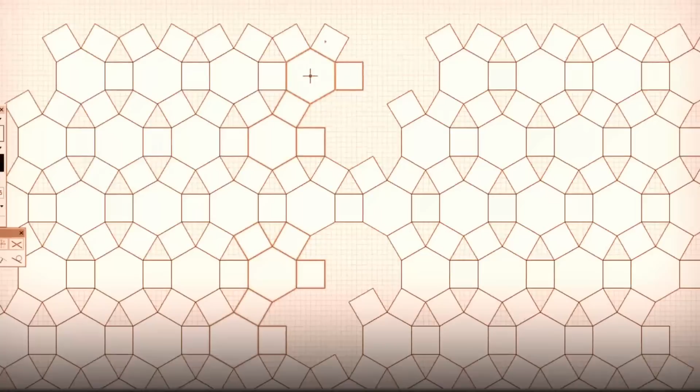In last week's video I set out to do the Everyday Objects Challenge, which this year we're doing something from our kitchen. This year I've chosen to do this grater, shown in the images here. The challenge was to do a front view, a side view, and a top view in 2D of this object, much like you would for a typical technical drawing of pretty much anything you'd like to build.

So I'm going to attempt that now on screen. I'm going to run through my front, side and top view, just doing them all in the same plan, all from the top plan view, and we're going to see how you might approach this as our final 2D object.

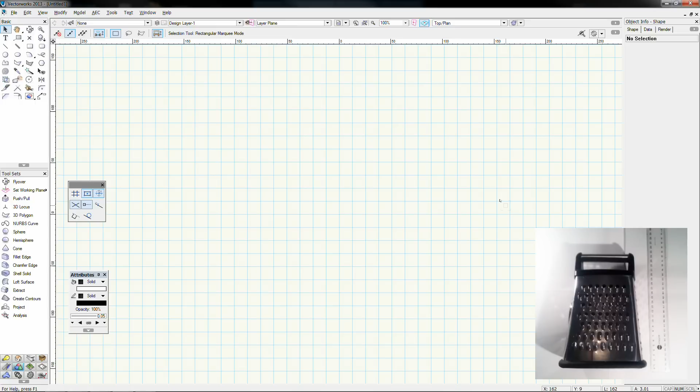So I'm going to start with the front view. That's going to be my first challenge, and I'm just measuring this up with my ruler here, and I'm going to break my grater down into 3 basic sections. So I've just measured the overall height, and I'm looking at about 220 millimeters. So I'm just going to draw a box to begin with that's that size.

So in here, I'm going to double click on that, and I get my height offered up here, 220. And just measuring the across distance as well, my maximum across is 160 millimeters.

So we're going to do that, 160 millimeters. I'm going to place that with the center of the box, a central bottom point here located at 0, 0. So you can see I've de-checked the position at next click option, typed in 0 and 0 in here, and selected my bottom center position, no rotation, and hit OK.

So there's my box, and I'm going to use that as my general outline. So that's the maximum size that this object's going to take up. So within that area there, this is actually broken up into 3 sections for me. 3 or 4, I'm going to try and do it as 3.

I'm just measuring the black strip at the bottom, located in the image that I'm probably going to put on screen, and let's just call that about 10 millimeters.

So I'm going to grab my rectangle 3-point mode here, just to mix it up a bit. I'm going to do this as the across bottom, and you can see I'm starting to move up here. I'm going to hit my tab key twice to get into that plus or minus Y section, and I'm just going to type in 10, and that restricts me there to either going up 10, or that's all I can do actually, because I've already locked the bottom points in. So I know that that's going to be 10 millimeters high. I'm going to left click, and there we go.

That's one division. Just going to measure the next division up from there. Goes from 10 millimeters up to 160, so we're going to call that 150 millimeters up.

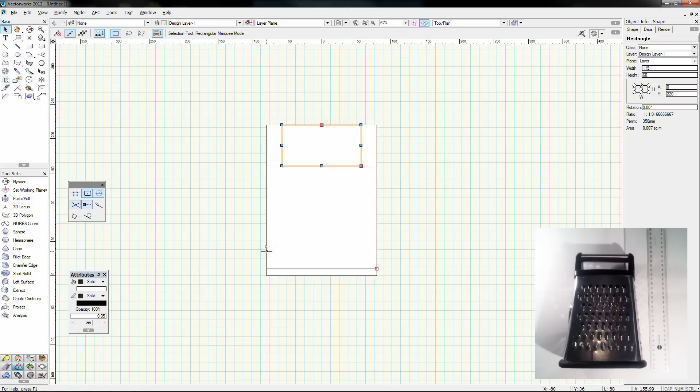We can draw that in right now if we'd like, giving you a couple of options. We could use the rectangle we already have, or this one here. I could draw this rectangle, make a triangle in there, and another triangle in there, select all 3 of those components, do a clip, delete the 2 objects, and there's my trapezoid shape.

I could have equally done that with the polyline tool in straight mode, clicking all the way around, and there you'd have it. So you can see instantly that's one of my components done.

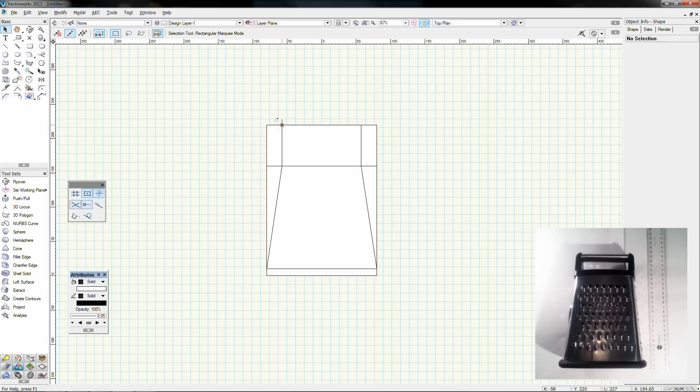Let's focus on the handle again. It's broken up into a couple of sections. There's this U shape made out of black plastic, which is 10mm wide all the way around - I've just checked that. The top handle piece is 15mm high, so I'm going to do this in 3 different components.

I'm going to grab my rectangle tool again, using this 3-point mode. I've traced down the side here, clicked, and then I'm going across, pressing tab, typing in 10, hitting enter.

To mix up our tool use, I'm going to grab the mirror tool, make a plane down here, and do a simple flip across, making sure it's on duplicate mode in the top left corner. Then we just need to complete that U by putting in the bottom rung, pressing tab twice to get to plus and minus Y, typing in 10, pressing enter. It has to be there, so I left click. Grabbing our cursor back, holding shift, clicking to select 3 objects - 3 rectangles in the top right corner - right click, add surface, and there we go, we've got a U shape.

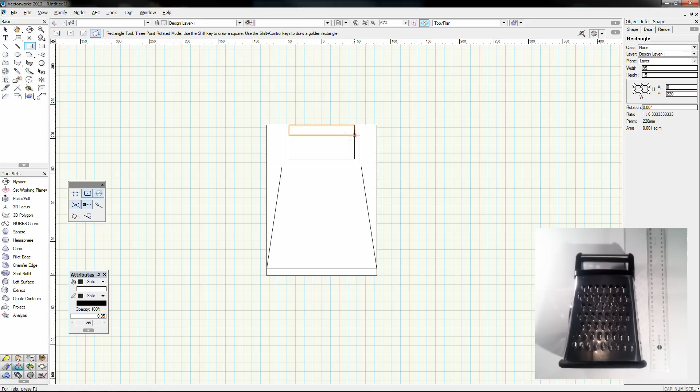Looking at this, the handle is actually recessed about 3mm down. So I'm going to draw the handle in first, across here, lock in there, -15 as my plus and minus Y, hit enter, enter. Then using Control M, or Apple M on a Mac, I'll put in a move of -3 in my Y offset, meaning it moves down 3. Hit OK, and you can see it's moved down a fraction.

So I'm going to work with that. There should be a rectangle in the back of there that I'm going to delete, so I should only have 2 components left there. And that's looking pretty good.

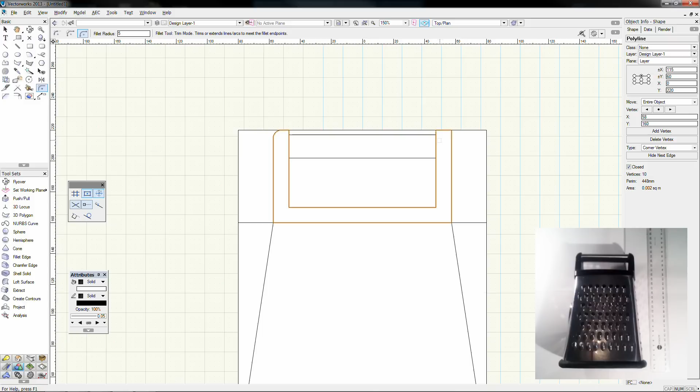Now I can round out those corners as well using my fillet tool, with a fillet radius - let's try 5 and see what happens. I'm going to left click, left click, left click, left click. That's actually pretty good - that looks almost exactly like what I've got sitting here in front of me.

Let's work on the bottom part now. It just uses a rectangle as far as I can see, and I'm going to have to redraw that trapezoid shape up above because it's actually slightly thinner than that, but that's okay.

Looking here, I can probably just use the rounded rectangle if I wanted, or I could just fillet all those edges out. Since this has a height of 10, it'll be equal either way, so I use the fillet tool across here and across here, which should round it out almost perfectly. You can see I'm just choosing the diagonal section that's rounding that out. Now it's not quite accurate - oh no, it's actually very good there. It doesn't quite taper out perfectly, but that's alright.

So as I said, I'm going to have to redo this shape up here. I can do this by double clicking on it, which gives me this point mode again. You can see it's automatically gone back to the reshape tool. All I'm going to do is grab this point here and bring it in until it meets there. It's left me a little bit because I'm actually on the addition mode.

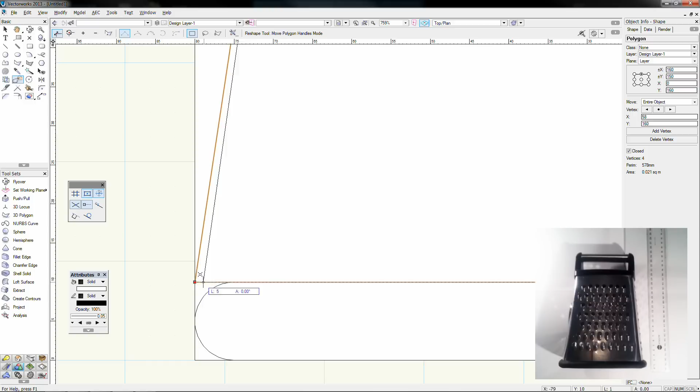That's a tricky one up here. You want to make sure this is on the move polygon handles mode, as opposed to putting in an extra point where it was darting this way and then back. I'm actually grabbing this point and pulling it back in, somewhere about there. That seems pretty good. Do the same on the other side. I could mirror it, but that's a good working model there.

Now I'm actually going to unlock these components in the background and get rid of them, so I'm just working with this basic shape I've got here. And I want that box as well. Unlock, delete. You can see that's already starting to take form here, and next I'm going to have to work on this circle array.

The important thing about this array here is just to get one of them perfectly right, and then the duplicating and offsetting is really easy. So the first thing I'm going to focus on is the circular part, which is actually the cutting part of this. Measuring it up, it measures 6mm.

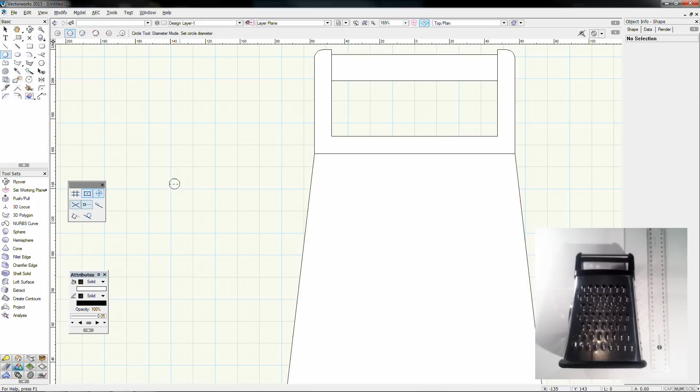So I'm going to make a circle here, and I could do this anywhere basically, off the side of my page. I just want a circle that's 6mm across. I've just started drawing this, not even noticing what mode I was in - I was in the across mode, which is fine, that's diameter, side to side. Press tab and type in 6, hit enter, enter, and there we go. Diameter of 6, radius of 3, that's half of the 6. And that's exactly what I want.

Now comes the trickier part, this kind of oval teardrop shape. I'm going to use the polyline tool for this, starting off in point arc mode, and we'll see where we go from here. Point arc is that exact circle mode, because I know it follows the 1, 2, 3 around here, and you can see it's just followed that radius.

Now this is the trickier part for me. I'm going to have to go - it kind of bends out a little bit, so somewhere out here, and figure out how far down I have to go. Using my ruler here, measuring from the center of that circle down, it's exactly 10 millimeters. So I'm going to go out 5 and then down 5 - length here of 5, that's great.

Let's lock that in. You can see it's giving me this, and then I'm going to come out about yay far - this is just a judgment call. I want the radius of this to come all the way down; it kind of bends almost all the way into a point. So I'm going to see if I can grab this center here - where's my center? All the way down here. Pretty much to there, and then we go up. I'm going to try and lock to this center point again, just here, which it's not letting me do because it's an arc. So we'll have to just do that all the way up into here.

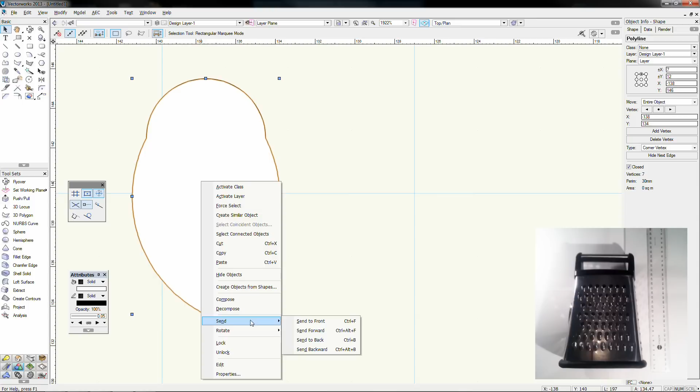I'm going to change my mode to straight line mode and do this. Now this isn't the most exact way of doing that - the reason I've done this is because I couldn't get a snap there. But creatively, if I just grab my mirror tool and mirror this across, I'd end up with this - kind of a strange Pac-Man shape. Then I'm going to add the two of those together. And if I right click on that, send to back, you can see I've got this kind of teardrop shape, which is pretty much what I wanted. I could curve that out a little bit at the bottom, but I'm not that fussed at the moment.

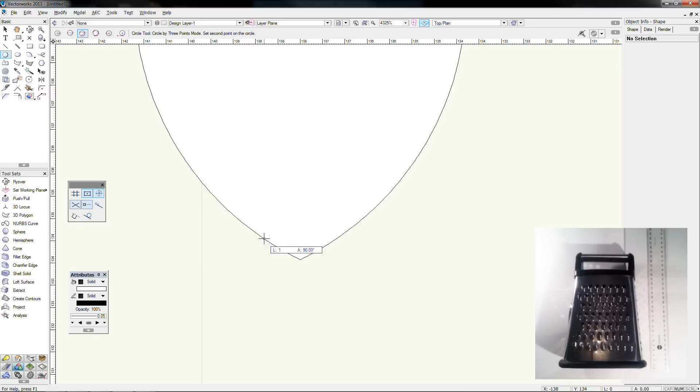Actually, I think we will - we'll just curve that out a little bit. So I'm going to do a technique here that I call a double cut, which some of you were asking about. If you can't use the fillet tool, what else can you do? Well, this is one of the things I like to do. I'll grab my circle tool, normally 3-point mode works quite well for this. So I'm going to put 1 point here and 1 point over here, and then you can see this third point.

Wherever I put it, it's going to adjust the circle, so I can squeeze it in. If I go down here, you can actually see I can adjust this circle to match my needs. So I'm going to just call it somewhere about here.

Unfortunately, we can't just say we want this part of the curve here to match this part of the curve here. It doesn't quite work that way, but this is what I mean by a double cut. I'll normally make a rectangle.

It goes from the 2 points that I defined and down here. If I grab the circle and bring that to the front, like so, cut once away, so I've selected the circle and the box, 2 objects up here in the top right hand corner, right click, clip surface. You can see if I press delete, I've cut the circle away from this rectangle down here.

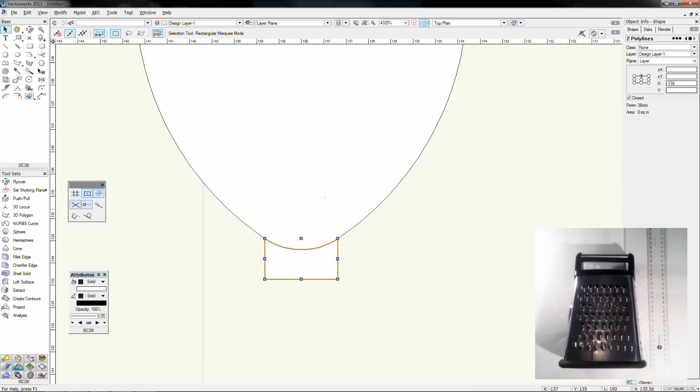So now I can cut this object away from this object here, and that's why I call it a double cut, because you're using a template object to cut away. Clip the surface, this is now the selected object, hit delete, and you can see I've rounded that out nicely there. So using that, I'm going to select the 2 of those and group that object.

Now it's all about this tessellating pattern here. So how are we going to achieve that? I'm going to work on one of the rows first and just define their spacing.

Grabbing my handy dandy ruler, I found out that the spacing here is 4 millimeters between each unit. So grabbing my duplicate tool up here, I want 1, 2, 3, 4, 5, 6, 7 of them total for the first row. I already have 1 of them, so if I want 7 for the top row I need 6 more duplicates.

And I know across here, what have we got? We can measure this from this side to this side. I've got 7 millimeters, just confirm that on mine here. 7 millimeters, that's pretty good.

So I'm going to select this object here, put it on the duplicate, 6 duplicates, and I've got this move mode. I'm going to start from here, which is this far side. We know across to here is 7, but we want 7 plus 4.

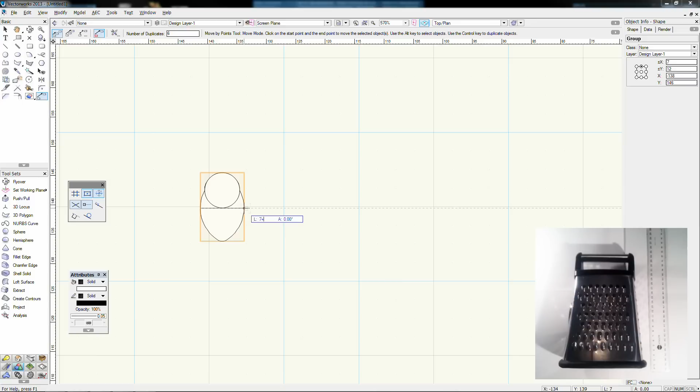So that's 7 plus 4, total of 11, accounting for the spacing between each unit. It's going to duplicate from this point across to here, plus the spacing, across there 6 times. Let's left click and see what happens. There we go. 7 units total, 4 millimeters spacing between them, and then all that's left to do is to center this up.

So I'm going to measure how far down I have to come. Let's have a look here. The top of the first one is sitting at 18 millimeters down from that black line.

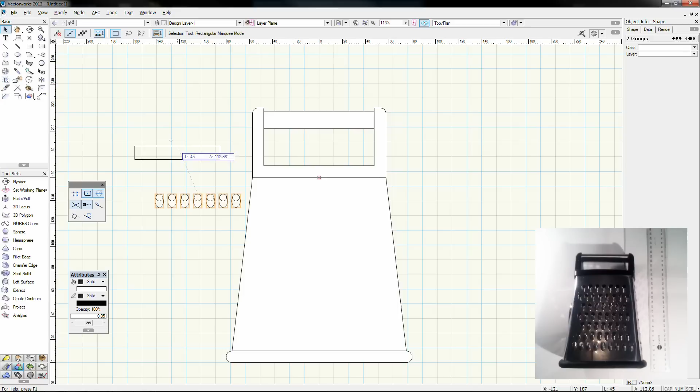So the first thing I'm going to do is grab this, move all of these and lock them in at the center. You can see I picked that up by approaching that, grabbing the top center of that circle and locking into here. That's looking pretty good.

Then using my move command again, Control M or Apple M depending on which system you're on, I'm going to type in -18, moving down 18 millimeters, hit OK, and I know that's the start of my first row there. So just having a look at this next, there's a 3 millimeter spacing between that and the next row.

So let's do that now. I'm going to copy these, edit, copy from up here, or Control C, Apple C, whatever you're feeling, and I'm also going to paste these in place. So that means there's a duplicate on top there, and you'll notice I've got 7 groups still selected, and I know there's another set under there.

So using my move command here, I'm going to move these down. Now just using the math in my head, I could have measured these, and I probably could have grouped it and it would have given me an option here, but I just know that circle there was 6 millimeters across, and then from there we went 5 mil and 5 mil down.

So I should end up here with a -13 as my offset, and then I also need -3 millimeters for the spacing between. There's a minus in there as opposed to a plus because I'm still heading downwards, so I want it to end up at -16 millimeters.

Hitting OK, there's my next row down there, and the funny thing about this one is that it's offset as well, so we actually end up with 8 of them as opposed to 7. I'm going to deselect those, grab one of these to mix it up, grab my mirror tool, straight down through here.

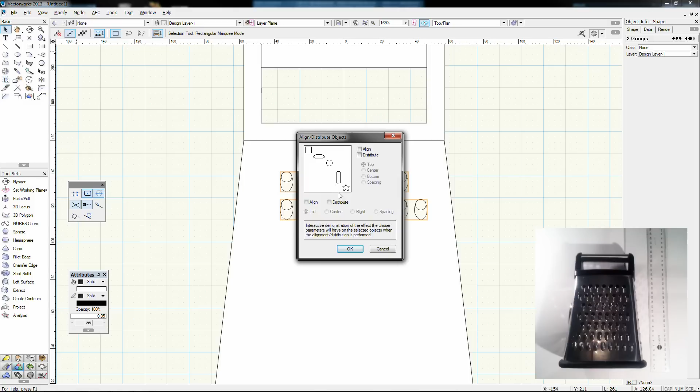Now, to show off one of the other features we should have learned about in the last lesson, I'm going to use the center command up here. So Align/Distribute, and I'm going to align to the center.

Now I'm just going to try this here. I should be able to lock this object. By locking that object, it means this one isn't going to move, whereas this one will. So if I do that now...

Align/Distribute, looking here, I want to go across ways. You can see the text is going across. I want to align their centers. Hit OK, and you can see what's happened is this one here has had to move to align with this one here. It's quite handy.

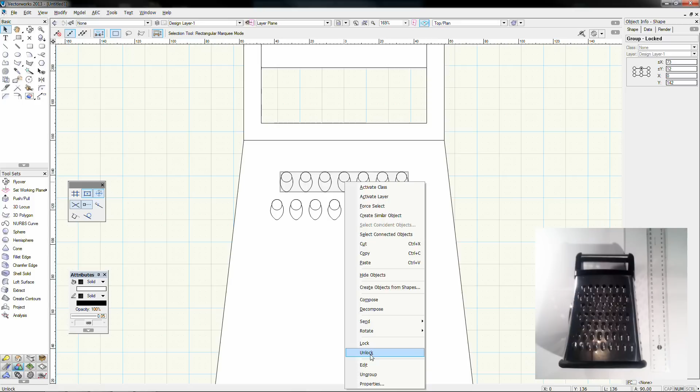So now I know the spacing of those is correct. That's looking pretty good. I'm going to unlock this object now, grab this one here, and I can probably just duplicate these if I feel like it. How many times? 1, 2. Oh, it actually gets bigger on the bottom one - we'll deal with that in a moment.

So, duplicate mode. I want 1 set, 2 set, I want 3 extra sets of this. So 3 in here, noting that I have the retain option still on here in the extra menu. The spacing for these is quite easy - it's this down to here, which it's telling me is 28 millimeters plus 3. So that's the spacing. There we go.

Duplicating made easy. I'm just going to have a look here and make sure it doesn't grow in any particular areas - it's only the bottom row that actually grows out. So I'm going to grab this group here and delete that because that doesn't exist. I should have 7 rows of 7, and that last row just has an extra one on each end.

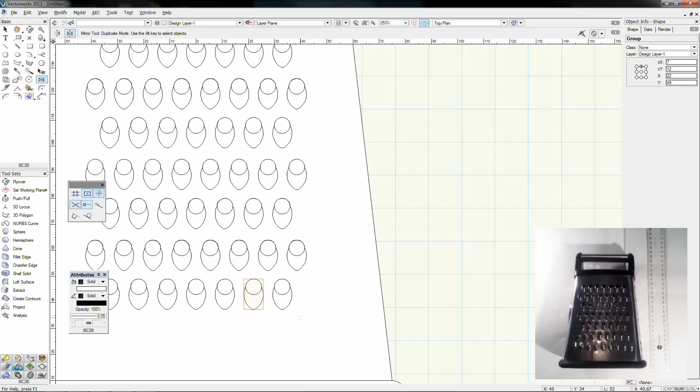So I can just ungroup this - that was Control U for me, or Apple U. Gonna grab this one here, grab my mirror tool, find the center of that circle and flip that out, and then just to be cheeky we'll do that as well.

So that's very accurate to what I've been looking at online at the moment. I could obviously color it, and there is a curve around the side. I'm not going to bother with the details on the side at the moment, but let's move on to another view.

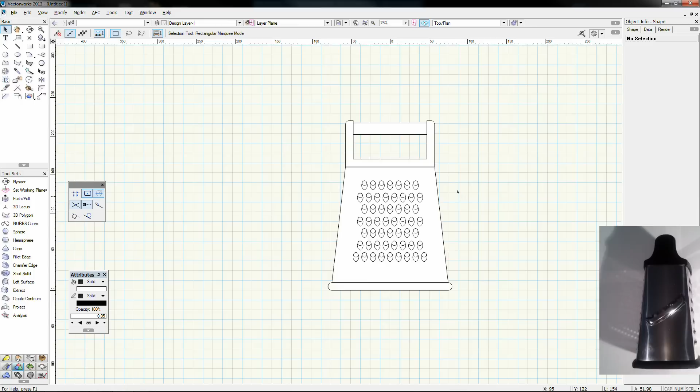So next view, let's do the side of this. I'm just going to use a lot of what I've got here to reference the next side view. The only real thing I need is the next width. I've just measured the bottom here, and we're looking at 100 millimeters across, and the top section is 80 millimeters across. So let's work on that now.

I'm just going to do the box method as before, using my smart points here really effectively. If I just lock into any one of these points here, let's grab this center midpoint or this end point, and you can see just using my smart points across here, do the height, which I know is 10 millimeters, but we can still use our smart points. Then our width across here, I'm going to do a -100 in here. So that's our general bounding box.

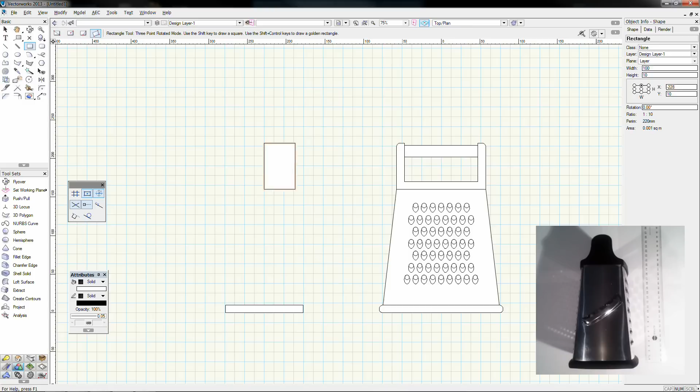And using the top up here as well, if I wanted to, I could say go to the center here. There we go, I've got that X and Y center lock going on. Coming out here, I know that I want to come out 40 millimeters - you'll see why in a second. And then up, all the way actually, as our bounding box to here. And then I'm going to use just the mirror tool across here and add those two together.

So now I've got a box here that's 80 millimeters across, 60 millimeters high, and this one here 100 millimeters across, 10 millimeters high. Just to quickly complete this one, because we know what happens here, I'm going to use my fillet tool on a 5 millimeter radius, same as we did down the bottom, and just cut all those corners off.

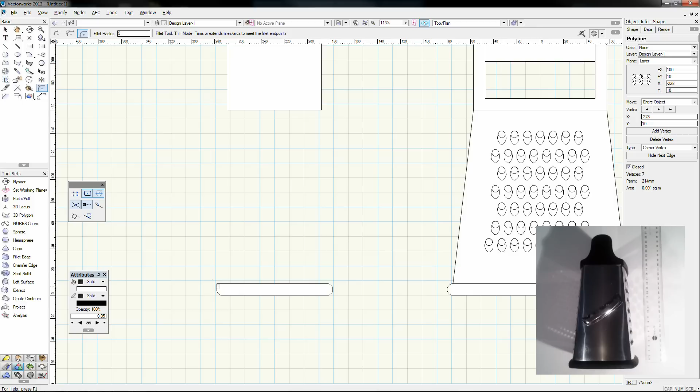There we go, awesome start. So up the top goes to 80 millimeters. It also shrinks in a little bit at the top, which is good.

Let's do that now. If I grab my rectangle tool, same as I did down the bottom, I'm just going to make a rectangle that goes up to here, and then a little cheeky cutoff using a double clip through here, and an angle on there as well. Right click, clip surface, delete. There we go, we've got that taper happening again. Obviously it's got a slight curve to it, but for the purposes of this exercise it's okay.

Let's focus on the handle next. I'm just having a look here, doing a bit of a measure. Looks like we've got 35 millimeters across as the general taper out, and another 10 millimeter lip on that. So 35 is through the center, so half of 35. I don't want to do the math, so I'm going to do 35 divided by 2.

Seeing as this is a symmetrical object, we've also got a 10 millimeter high box. I just like using as many rectangles as possible as guidelines for myself. Across to here, there we go. I'm going to grab that and flip it across the other side, like so. Add those two together, there we go. So I'm just kind of making margin lines for myself so I know where things go.

I also want a 10 by 10 box in here, which I'm going to do now. Slightly missed on that. Holding down shift there, I managed to get 10 by 10 because shift makes it into a square, constraining the proportions.

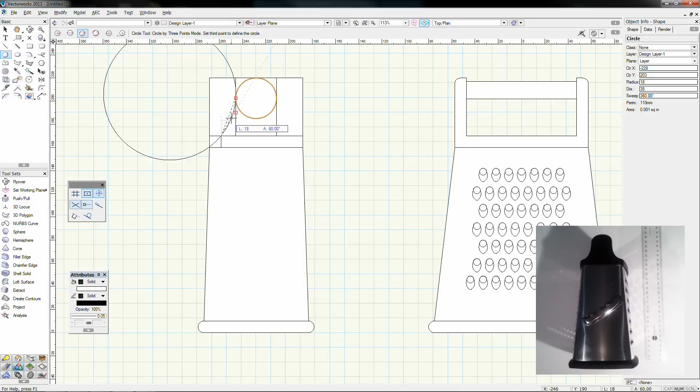So I'm going to do a double clip on this once again just to get the object up into here. Bring this circle to the front. Right click, clip surface, delete the circle. So I've got that nice little taper going on there. I've got this circle on, and then I'll flip this across to the other side and we'll see what happens.

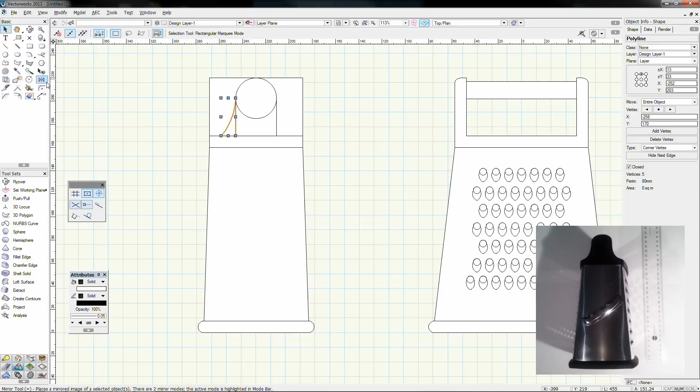Using this rectangle that I built before, I'm just going to bring that down to fit into there. Delete this 100 mil, grab this, flip it across the other side. Grab all of those components there except for that back rectangle, right click, add surface. That's looking pretty darn close to my handle, I have to say. I could use a little bit more rounding down at that bottom by a couple more clips, but I think we're going to work with that for now.

So the only thing left on this side is this kind of smiley face giant grate, I guess, in my grater. It looks similar to the bathtub that we did in the first lesson, so I'm going to just pretty much do exactly what I did that time, except on a slant. So just so I get my outline here, I know that this is 70 millimeters long, and overall I'm going to guesstimate about 10 in terms of height.

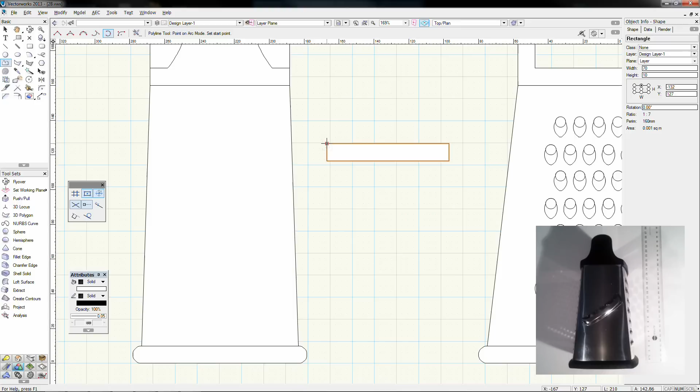You can see I put that in wrong there. Click first, chuck in 10 here, there we go. So I'm going to grab my polyline tool here. I'm going to set it to the triarch mode. Going to just kind of do this to the center point here, back up again, put in a little circle like we did with our other exercise, down to the bottom here, up to the top here, do another similar circle. I'll see if I can lock that from there.

Can you let me have that point? Yep. Just guesstimating.

That's pretty good, I reckon. Get rid of that backing piece. Oh, actually, no, I'll use this backing piece here to make my next object. So if I bring that down to about here, I have to shrink that in a little bit. Just clip that out.

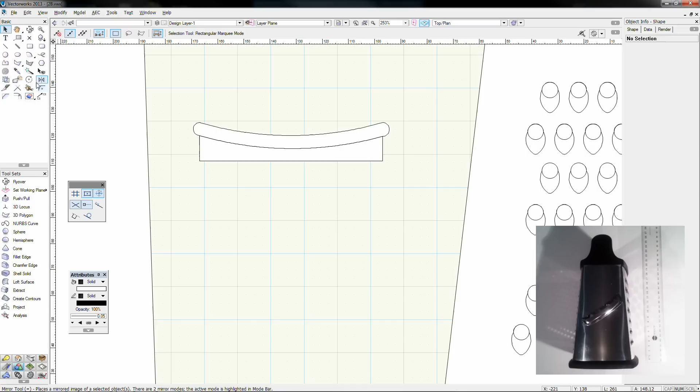You can see this is a very free-form process right now. And then it's just got some really nice fillets in the edge there. Probably, that's going to be too large, I think. Yep.

Let's say 10. Let's see what happens if I do that. It's still too big.

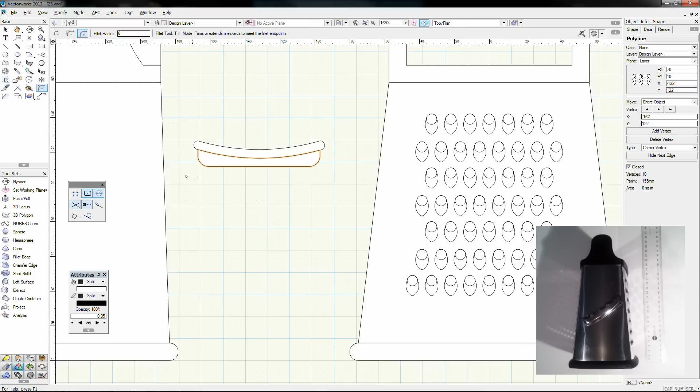That's looking like it. Across there. Bring that in. Now I'll just check the center location of this inside my shape here. It's about 80 mil from the bottom.

It's on a 45-degree angle, so just going to group both of these temporarily, and then using another command here from our rotate menu, rotate in the 2D form, 45 degrees. Now we want this to be anti-clockwise, so I'm going to throw a negative in there. Oh, no, I've done this the wrong way.

Rotate 45 degrees. Is it? Looks like it's a little bit more than that. So I can use my freeform rotate to actually get that the way that I'd like it. Just visually, it's pretty much there.

And then we just need the 80, so I'm just going to choose a center point here. I'm going to drag this down to here, using my move command, throw in 80 in here. That's pretty good. Get rid of this backing plate.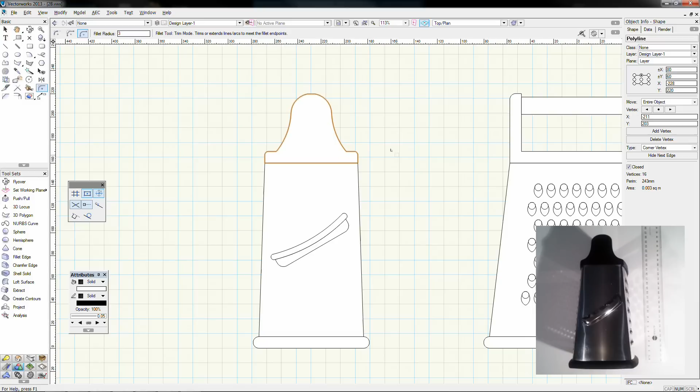I might just throw a tiny little curve, like a 3mm one, just onto here. And onto here. I'd say that's pretty close.

So let's do the top view now. And the top view is obviously just going to be a combination of all of these factors here that we've already discussed. So we already know the width of this. Using these 2 points here, I can just drag this up, knowing that it has to be there.

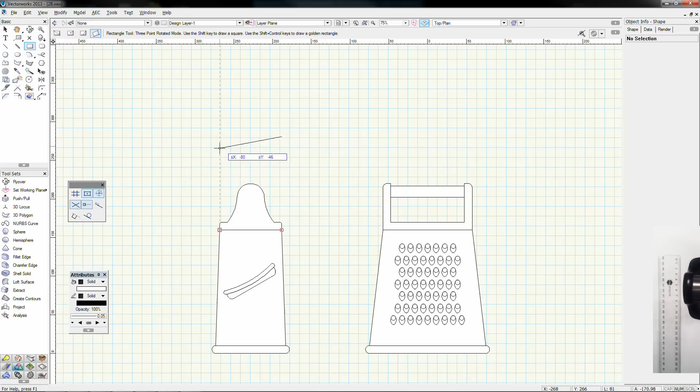And I'm just going to guesstimate that height. And I'm actually just going to measure this. What have we got? 115, that's right. So I can simply go back to here, set a bottom locking here, and set a height of 115.

Obviously I could be putting this here, or I could be rotating that left, which I just did with Control L for me, Apple L for you guys. And I could obviously place it over here. That's probably going to look better in this scenario.

So looking at this from above, it's actually got this kind of semi-ovular shape to it. I'm going to try and cut that out from the sides, and then I'm going to work on the handle from that.

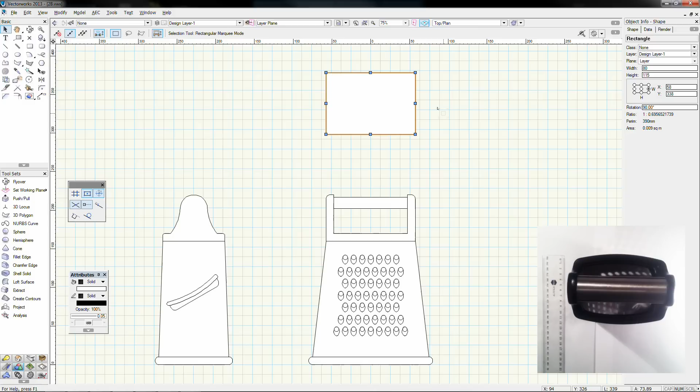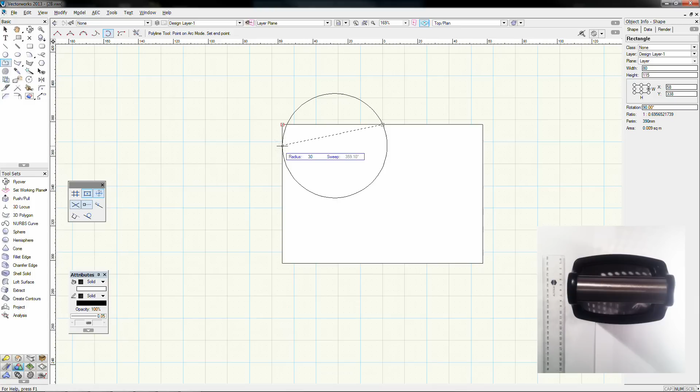So if we're looking at this like this, I'm going to grab my circle tool. Actually, I'm going to make a polyline out of this. I'm just going to choose a point about here, let's say, around here. I'm going to see if I can snap that to smart points. I can't, so I'm just going to have to guess over here. Actually, let's do it accurately.

Grabbing my ruler, it's 4mm, so I'm going to draw a box here. Negative 4mm. Also going to mirror that to the other side. Obviously didn't get that through the center, so I'm just going to pick that up by the corner and snap it in.

Now using our polyline tool, I'm going to also do these bounding boxes. I'm just going to quickly rotate them because I don't really care about the size. Around to here. Should have had that on duplicate, so I'll do it again.

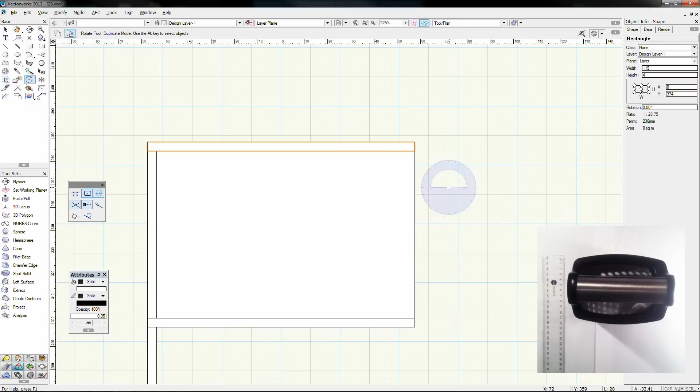1 click, 2 click, 3 clicks. So that's 1 click puts the pin in, 2nd click chooses the line, 3rd click rotates the line around the pin. So now I've got that, and I'll just shrink those in really quickly.

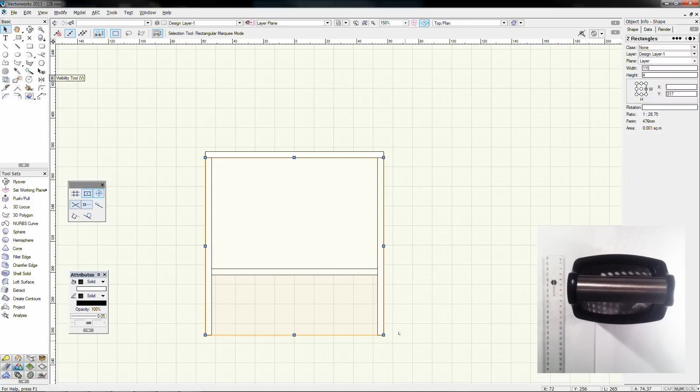They're going to have a width in this sense of... that's incorrect. Let's do it the easy way. Group those, grab a handle, bring that into here. Cool.

So using my polyline tool here on point-on-arc mode, starting from here, going up to here, getting a center lock, going to here, going to here, then to here, down to the bottom center, up to this top corner, top center, corner. That's the shape that I want. I'm going to select everything except for that and hit delete, and there we go.

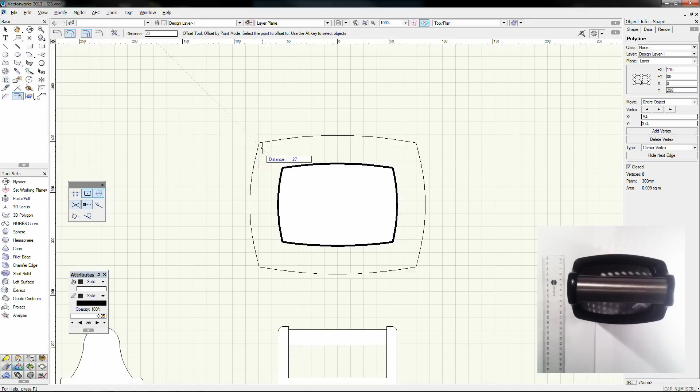So I want to shell this out. Obviously if it was a 3D object I'd use the shell solids command, but here we're going to use the offset command. I'm going to choose duplicate mode, offset by point mode, grab this, and draw in and out. I'll choose a distance of negative 7 millimeters all the way around. Now I've got 2 objects.

Grab both of those, clip the surface, and that'll be hollowed out like that. Now I'm actually going to keep this piece because I want to use it later on, so I'm going to undo that and put it back in place.

We're just going to quickly do the handle, which is just straight across. I need my ruler out for this one. It is 28 — that's the interior of the handle.

So what we're going to do is draw this box here, take that up, and do a height of 28 divided by 2. I'm going to choose my mirror tool to duplicate that across there, then add those 2 surfaces together. I just like doing that, it makes it a bit easier in my head.

And just so we show off even more, we're going to right click and choose intersect surface, which will give us this lovely object, the intersection of those 2.

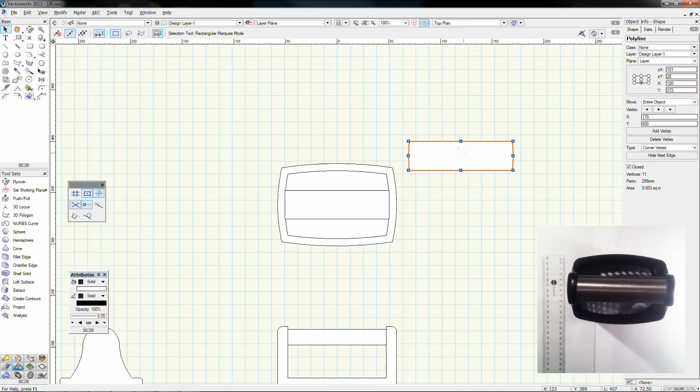Now if I just go back a step and put that back in place, I'm going to delete this one here, and then I want to make this one here. I could have deleted that as well, which would leave it hollow, as you can see, which is what we want eventually, but I'm actually going to copy it temporarily.

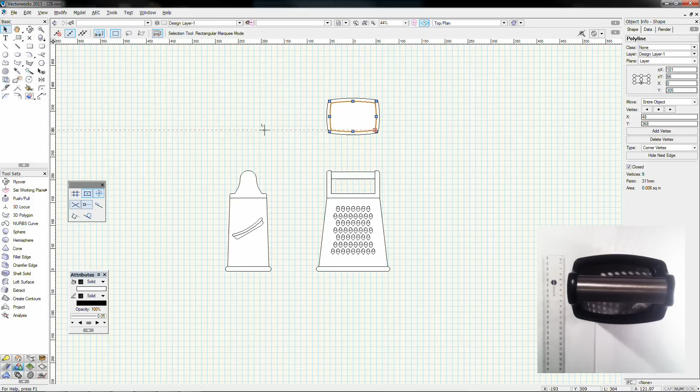What am I going to do? I'm going to paste that in place. Then we need to expand that, so I'm going to use this here temporarily just to get that expanded correctly.

So I'm going to use the offset tool again. This time I'll put it on offset the original object, so it doesn't duplicate the object. Choose this edge here, bring that out to there, move that to the back — I'm just using Control B for that operation.

And then I'm going to expand this one as well. This one here is going to expand out to that point there. Just get a smart lock on that, and get rid of that box. Then I'm going to move those to the back.

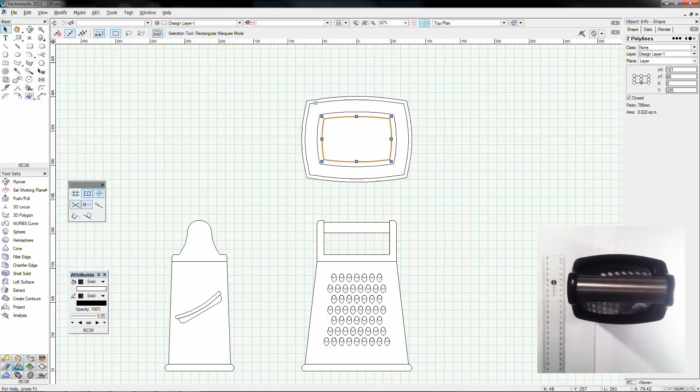And because I've still got that, I'm going to paste in place, and I'm going to cut that one away from this object. Clip that out, and also this one here, the base object. If I delete that — there we go, we can see all the way through it.

Now obviously you'd see these somewhat in this perspective, and the other bits on the sides. Just for artistic purposes, you could put lines in here to delineate those edge points, even though you wouldn't really see it, and add some finer details such as rounding out these corners. So I could grab my fillet tool and do a little bit of artistic licensing on how this might look.

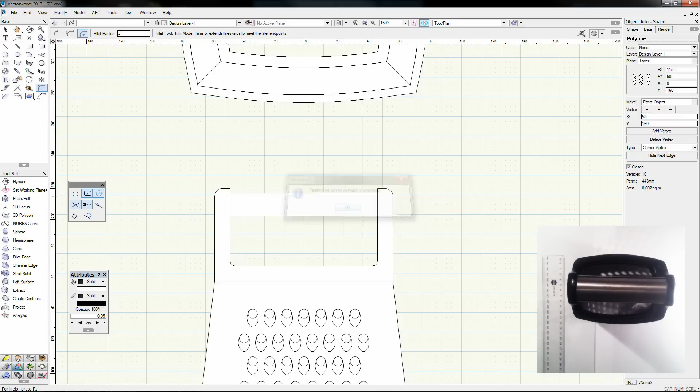That's okay, parallel lines, fine. But that's pretty close, and that's what all of you should probably achieve looking at that with your kitchen object. That took me a good half hour to do that exercise, but we were running through it a little bit slower, and that's okay. So have a go at that, if you haven't done so already — that was my attempt at the kitchen object for the everyday object task.

And let's move on and have a look at some of the other answers that we might have got for questions relating to the end of the video.

So I'm now going to have a look at the technical drawings at the end of the lesson, we're up to 2A. There's 30 odd of these to do, so I'm going to break it up and do 10 at the end of each of these videos, just so you've got a week or so to get your head around it. It doesn't get too repetitive and that kind of thing.

Now, one thing you'll have noticed is that the next lesson on layering is essential to how you'd approach this task, because you don't really want to draw them all on the same plane. I'll show you why: if I was just grabbing this box here and drawing this, and this, and this, saying these are all 3 different things we're going to work on, similar to the drawing.

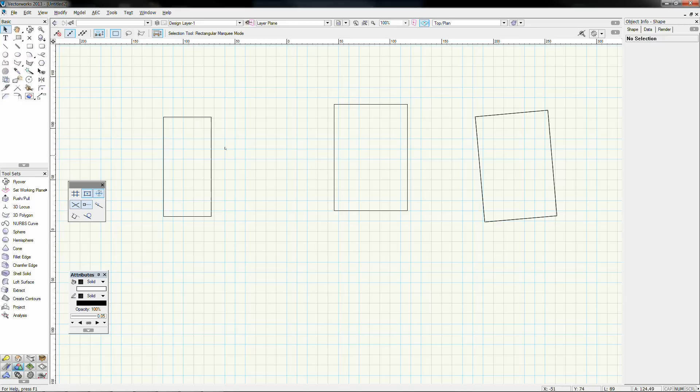And if I extruded all of those with Control E so that they were 50 high, the moment I go to try and work on the side view of this one here, which they're all grouped at the moment, I'm just going to ungroup that.

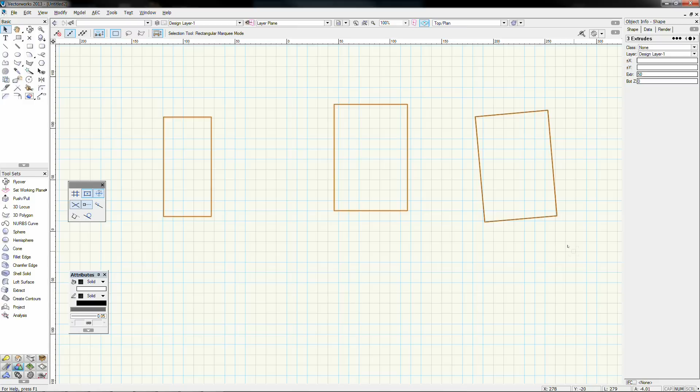So I'm going to quickly run through just making a new layer, because that's all I really need to focus on right now, making a new layer and swapping layers. Then when you watch the next episode, 3A, coming out directly after this, you'll see how you actually make layers, how you can use them, what different layers are, what you need them for, what they're good for, what they're bad for, all that kind of thing.

So don't fret too much about that. If you don't feel confident completing this task because you don't know enough about layers, you can just watch 3A and then come back here and see the solutions for this, and the solutions every week coming after.

So just briefly, I'm currently up here on design layer 1, and notice this is a design layer. There are only 2 types of layers, design layers and sheet layers. Design layer - this is where we've been for the last little while. You can zoom in, zoom out, draw stuff here in 3D, draw it in 2D, all that kind of stuff.

So there's a little button here next to it which is just layers, with a little stack of paper saying these are the different layers of our drawing. I can left click on this and it will bring up the organization palette.

Now I don't want you to look at any of these tabs up here just yet. We're going to get to them in lesson 3A, so don't fret.

All you can see here is this is design layer 1. Now there's 3 little tabs up here. You'll see a little black eye at the moment, which says visible if you hover over it. If I left click in the middle column, you'll notice it now says invisible. And the 3rd little column, if I click on that, says grey.

You also notice it's a black eye, as though you can see things, a cross meaning I can't see anything, and a grey eye meaning it's greyed. Grey just means semi-translucent. So you can just toggle between these for each of these layers.

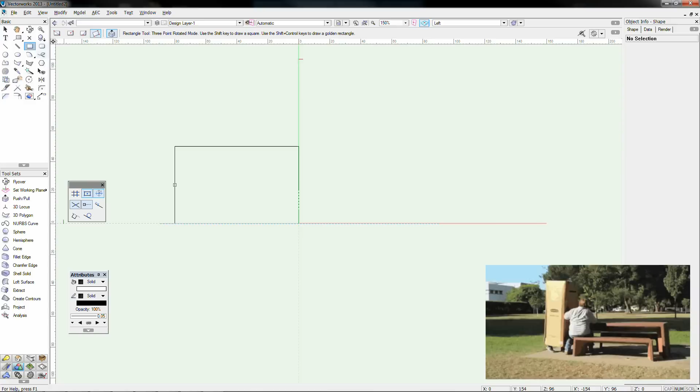So this is drawing in 3D now. I'm going to start in this top corner here and move downwards, 1, 2, 3, so that's 30 down. Make sure that's a negative in front there. You can see I'm now locked on this negative 30 line here.

Because I'm doing a 3-point rectangle, I'm going to click once and then come across here and do a negative. 1, 2, 3, 4, 5, 50. Negative 50 in there. So now I've got this.

Now it was going into push-pull mode there, but I like to do this just to start off with. I go Control E for extrude, gives that an extrusion of 40.

This is demonstrating something a little bit different. I've drawn on this surface here, which is in a 0 plane. So when I go back to my plan view by pressing 0, you can see it's now offset from the object. So I just want to grab that left corner and drag that back in there.

So you can see I've got these two boxes, they're now really nicely aligned. If I float around here and have a look at it, there we go. I'm going to grab both of those. So I've got two extrudes up here in the top right hand corner.

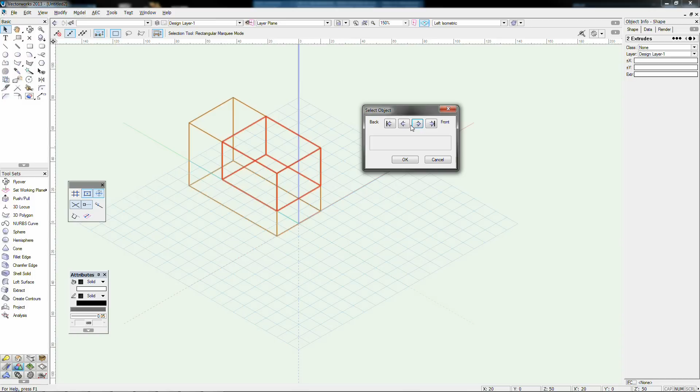Right click if I like, and subtract solids. Now it asks me which one do you want to cut into. Highlighted here in red, I can toggle between them. Obviously I don't want to cut into that because it'll just get rid of it. So I want to cut into this big red one here. Hit OK. You can see it's cut that section out, which looks exactly like what I wanted.

That's perfect. So I'm going to return that to a plan view. Now, toggling to my next design layer, I obviously want to go into here and turn design layer 1 off. I don't want that anymore. And I could leave design layer 2 invisible if I like and just jump to it and make it active.

You'll see it's gone. But where's it gone? If I drop down this here and jump on design layer 1, there it is there. Design layer 2 disappears. Handy things to know right there.

So this next one, although similar, is in fact a little bit different. So therefore I'm going to draw it independently again. Just looking at it now, it's 1, 2, 3, 4 across still. Yep, but the height is actually 70 this time.

And to save myself time later on, I can see there's already a notch cut out of this corner here. That's currently 20 high and it's 10 deep. So I'll just cut that straight out of there. Boom.

Now it's also got another rectangle, and just because I'm in this view, I like to try and do as much in plan view as I can before I have to jump into a 3D view. I think it's a good principle too. 1, 2, 3, 4, got 40 high over there. And going across here, that makes sense.

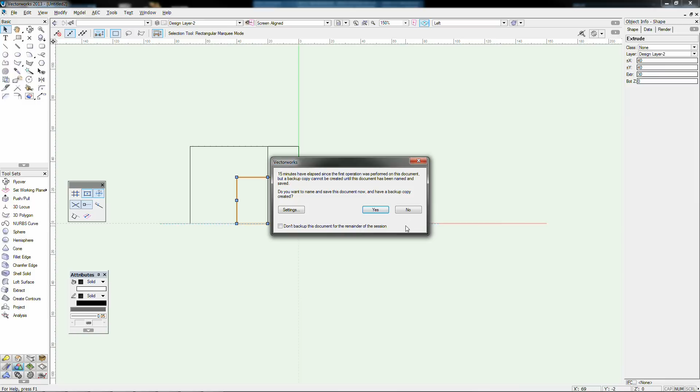So now when I go to my left-hand view, you can see I've already got the things that I need here. I'm just going to use my move command. Now notice that I went Control M then, as opposed to Control Alt M, the difference basically up here from the move and the move 3D. Move 3D is in relationship to the 3D view, giving you that Z-axis, but it's in relation to the planes themselves. Whereas the move that I'm currently using is related to the screen that I'm looking at now.

So when I go to the first move here and use the X and Y offset, it's relating to what I'm currently looking at.

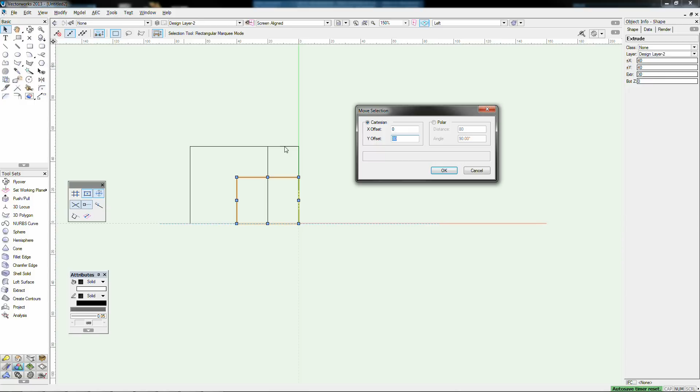So the example I'll do here, I want to nudge this up 20 millimeters. Okay, so that was relating to Y. Now this green axis here is actually Z in the real world, but in my current perspective, this is still X and Y in relationship to that move. So you really have to think about that when moving things. And if it's a little bit complex, I'll try and explain it further down the line.

So now looking at this, you can see in my 3D view, this is intersecting properly. And if I make that clip, subtract - that's not the object, I want to toggle to that one. Hit OK, and there we go. That's looking pretty good.

So I'm just going to whiz through these now. I might even speed it up a little bit. So I'm going to do 3 and 4, and then I'm going to jump back and see you at 5.

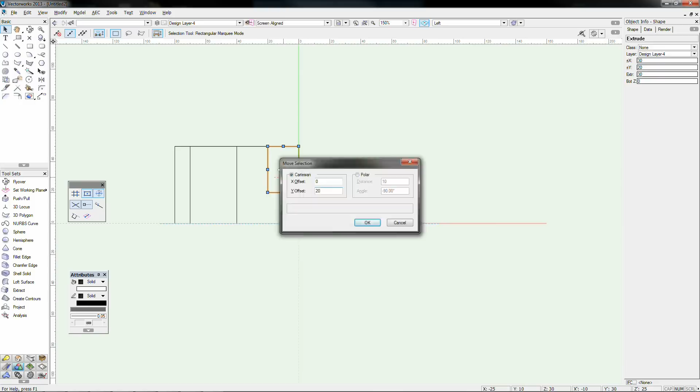So we've come to number 5, which is the first kind of tricky one. Those other ones were really quite straightforward in terms of their boxiness. So I'm just going to work now on this angled one, just to get you guys through it.

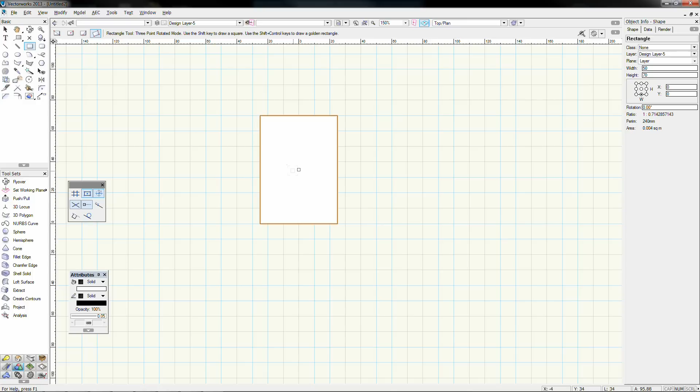So once again, starting off here, just going to draw a box. It's 50, 1, 2, 3, 4, 5, 6, 7 this time, just to mix it up a bit. That's good. And it's just a box, so I can go straight ahead and extrude that out. It's 5 high again, so 50 in there.

So there's our box, that's our working there. Now I'm going to look at this in a front view, and you've just got to think of that as a triangle. You can see the triangle there. It's 3 wide and it's 1, 2, 3 deep as well, which is convenient for us. So I'm just going to draw - how would you normally draw a triangle when you're looking at it in 2D? You draw it with 2 rectangles, is probably the easiest thing to do. So here I'm just going to draw down.

I'm going to type in negative - what are we doing - negative 30 from here. That's good. And then I'm just going to draw this out here. And what do we normally do? We would do a 30 across. There we go, that's our regular old deal there.

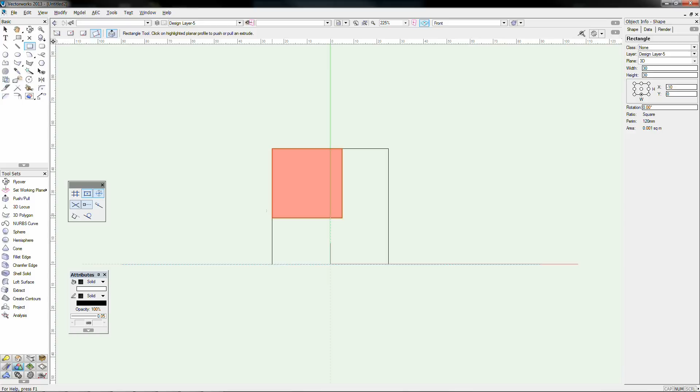Now how would we normally do this? We would draw another rectangle by grabbing this, drawing across here, down this way. 2 rectangles, grab the both of them, clip surface, delete that one, left with a triangle. Extrude that out, 1, 2, 3, 30.

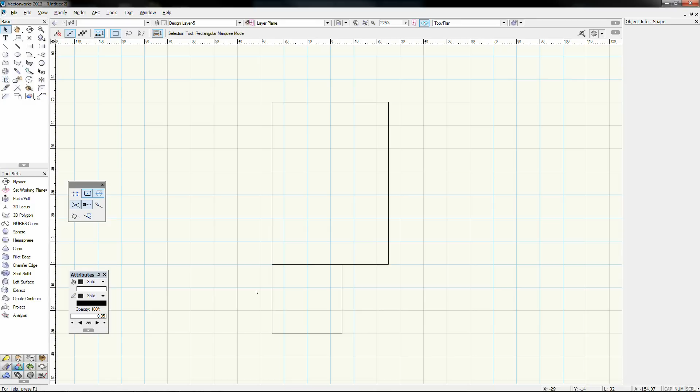There we go. So now if I look at that in a top view, I'm going to grab that and drag it so it locks to the center of this. Boom, there it is. If I have a look at that, you can see the shape there. Grab the 2 of those, right click, subtract the solids from the bigger one, hit OK, and I'm just going to quickly render that so I can show you. There it is, fully done.

So that's pretty straightforward. You just use your 2D objects like you would in the 2D world, draw them onto the plane just like I did then, and then just cut them, intersect them, anything you need to do, and then make them into a 3D object.

Now there's an important setting up here that we're going to talk about right now, and I'll discuss it when we get to layers as well, because it's related to that. But it's whether you're in layer plane or screen plane. And basically layer plane - I can demonstrate it to you now - if I try and draw this rectangle, it'll automatically switch here to automatic, which is very much the SketchUp model. So there's really 3 modes when drawing some of these, but there's 2 that you have to focus on.

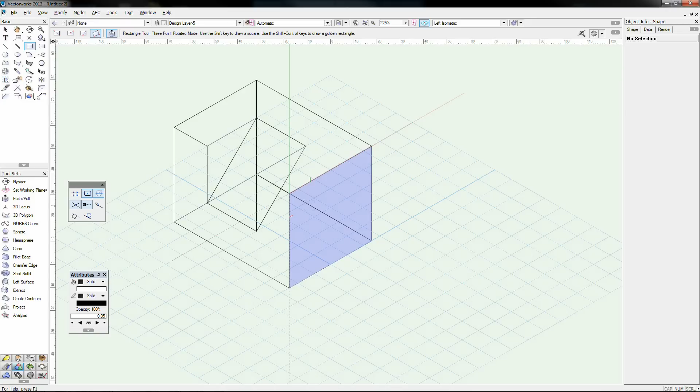Automatic is the SketchUp kind of deal, where the moment I try and hover onto this, you can see each of these things will turn blue. And it's trying to adapt where you're trying to draw this 2D object on a 3D box, kind of like putting a poster on it. So the most predominant one will be here. If I try and draw it onto here, you can see it's drawing as though it's on that plane there. And if I draw this box, you'll notice that it takes that same perspective, I guess, or as though it's just been stuck onto that board there.

Now there's 2 other modes. This one here is handy if you're using your push-pull tool, because it means you can then grab this, pull it back into the object, pull it out of the object.

There you go, it's on the same plane as that. But there are times when you don't want that to happen. I'm going to draw another one where you'd actually like that to be on the layer plane. So I'm going to switch it to layer plane here, and you can do it. I think it's the backslash key that does it.

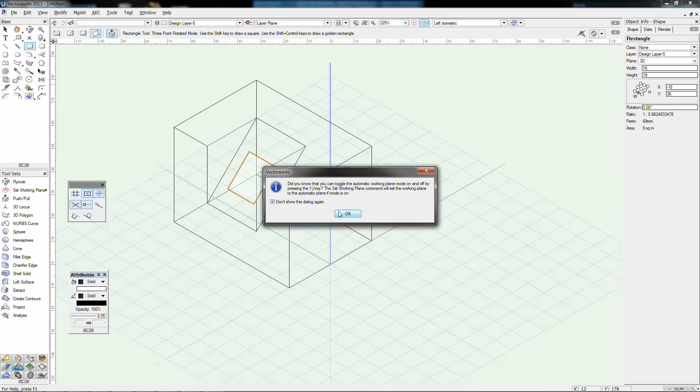When you've got it set to layer plane, it relates to this blue dashed world that we're normally used to drawing in. You can see the moment I start drawing, it's relating to this plane, to the X and Y axes as they're meant to be: Y running through here, green line, and red running through this way.

Then there's another option here, screen plane. Screen plane is really difficult because we're currently in an isometric view. Screen plane is like a bug on your windshield, so no matter what 2D object you draw, it's never drawn in 2D. It's drawn in the view we're currently looking at, as though it's stuck to our windshield. There are 3D objects in play here, but this is always predominant.

I'll show you here - if I rotate this around, see how it's just stuck to our windshield? It doesn't actually move until we get to an adaptive part. So if I'm looking at this in front view, and I then extrude this object and put an extrusion on it, all of a sudden it will have taken depth from the view we were looking in and popped out. Does everyone see how that worked? I'll do it again for you.

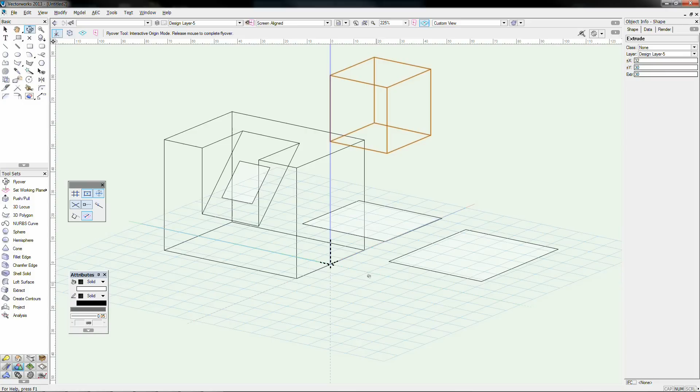So here I am in an isometric view, or any other random view I've chosen - it could be plan view, it could be this view right here. If I draw a rectangle in screen plane mode, here it is, it's just stuck to our windshield. See, it's just floating there. No matter what I do to this drawing, spin it around, it doesn't change.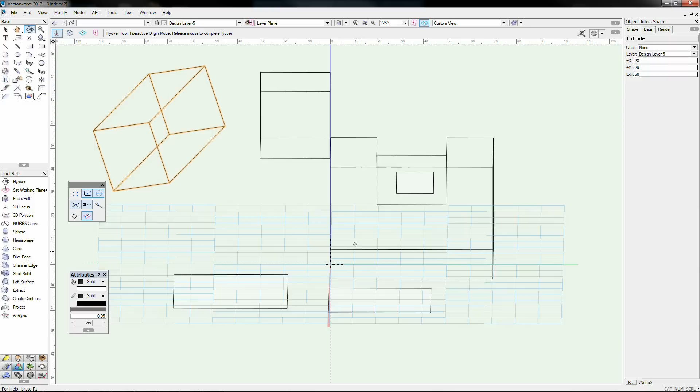The moment I go to a view - and I'm just going to choose an obscure one now, like this crazy isometric I've just chosen - if I extrude that, maybe 60mm, it will have popped out of the page in the orientation it currently is. You can see there it is, floating on that weird angle we were looking at it in. That's all of a sudden changed my entire mind.

So, 3 important differences there. When you draw a rectangle in a 3D view, you get 3 options: automatic, layer plane, screen plane. Automatic adapts to the 3D objects you're using and chooses the plane it thinks is appropriate to your drawing. Layer plane chooses the layer plane, the blue box you're kind of used to, which is most predominant when starting a drawing where you want to live. Screen plane is handy if you want to draw something from here or here, but you're having issues with the automatic snapping. I'm going to run through that in lesson 3A again, just because it's so important.

So, just to clean up this - get rid of that, get rid of that. We've successfully made that. Now I'm going to move on and just do the other ones here on an angle - I don't know which numbers they are. I'm probably going to do numbers 6, 7, 8, 9, and I might come back to you for 10. So I'll see you soon.

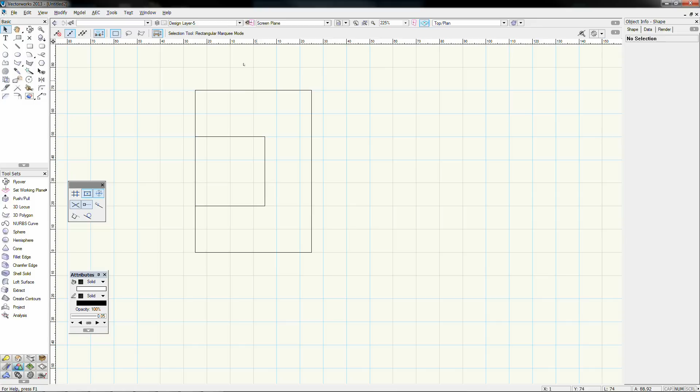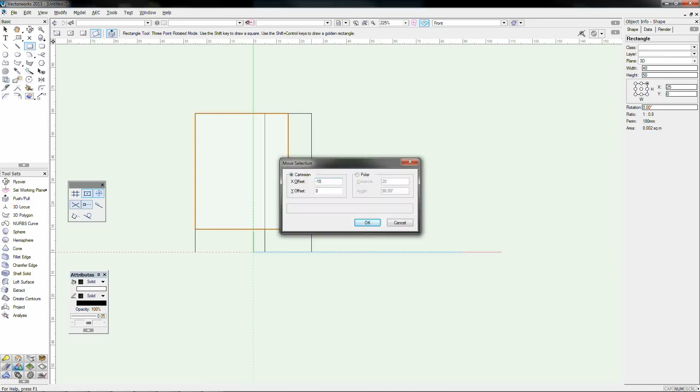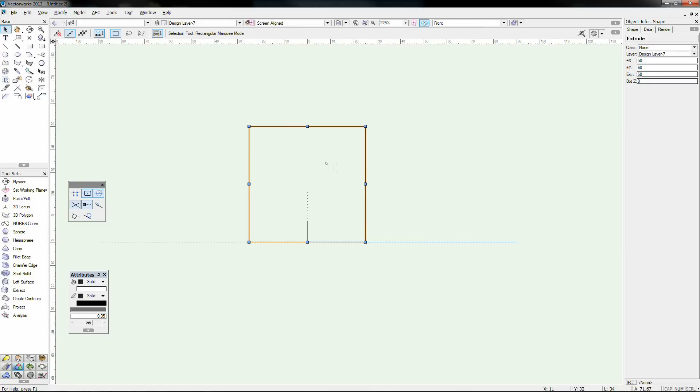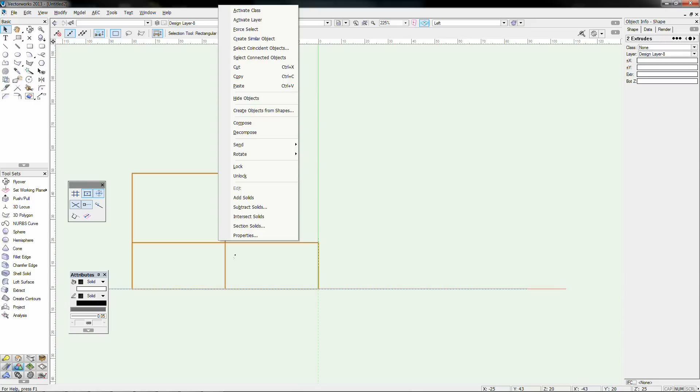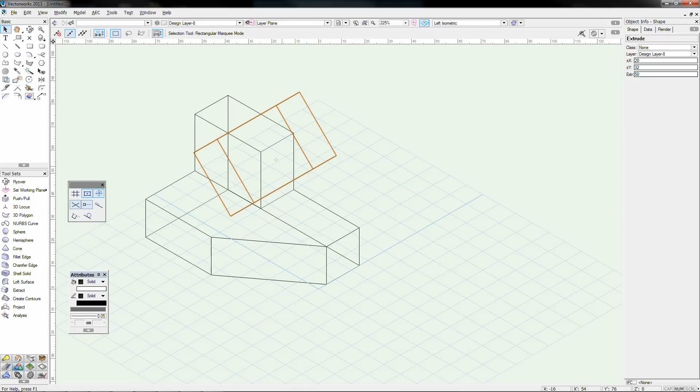This is number 10, the last one for today. Hopefully you've got the idea from 6, 7, 8, 9, working our way up here, that this is just a triple triangle cut out of this thing.

So once again, we're just going to start off with our box, double click, because I love the double click. 1, 2, 3, 4, 5, 6, that's a 7 by 5, just to mix it up a bit. I'm going to extrude that all the way up to 1, 2, 3, 4, 5 high. So that's our starting box right there.

It's just 3 really easy cuts through here. So I'm going to draw a box, same as I've been doing through the last little sections, just so I know where I'm heading. I'm going to do a minus 40 on that, and it goes all the way across and leaves just one square. So where's that take us to here? 40, must be 40. There we go.

Now I'm not going to draw another box, I'm just going to do this and this, and I'm going to get rid of that box and just extrude that. The extrusion, as you've seen me do, can just be far greater than the length of the object. So I know this is 70, so I'm just going to give myself some room to make it 90, because we're cutting this object away. It doesn't matter how far it extends beyond this point or beyond this point, we don't even care.

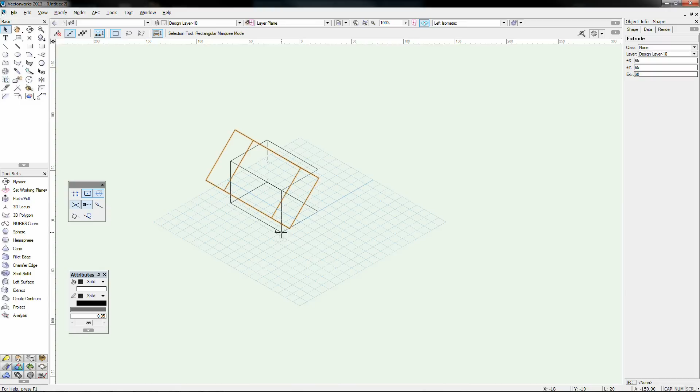So you can see that's my first cut, I'm actually going to do that right now. Zoom in so you guys can see that a bit better. Right click, subtract, hit OK, and there it is. That's the first planar object, and we've just got 2 on the sides there as well.

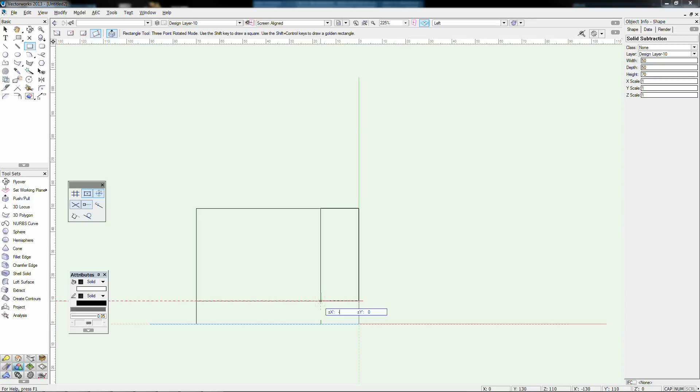So I'm going to look at that in the front view. Here we go, drawing my box straight down to this point here. I'm going to just do it by numbers because my snaps just aren't working in this view. Minus 20, there we go, like that. I'm going to draw another rectangle straight across here and out that way, then get rid of the original.

I just know this is mirrored on the other side, so to save time, find my mirror tool straight down the middle there. Grab the 2 of those, holding down shift there. Right click - no, actually I just want to straight extrude those. So model, extrude, asks me for an extrusion once again. I can just hit enter because that's far beyond the 50 millimeters that was there. Drag those 2 into place so they're fully running through the object, grab the object as well just to make sure, subtract - I want to cut it out of this red one here, the central object. Hit OK, and there you go.

That's pretty much it, that kind of strange pyramid almost structure.

So looking at that, I'm going to drop this down. I got 10 design layers done, that hasn't taken too long there. Let me just check my time - I'm at just over 20 minutes, 20 and a half minutes at the moment, so that's not too bad.